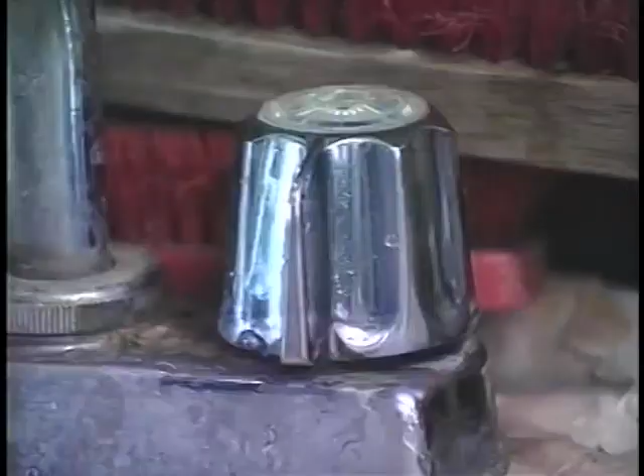Water hammer. It's a familiar sound nearly everyone has heard in their own home when someone slams a faucet closed. You've probably also heard it coming from radiators during the winter heating season.

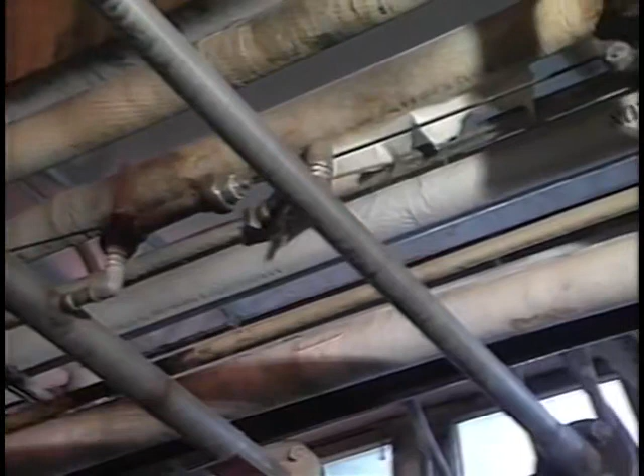In industrial situations, though, water hammer is more than just a noisy annoyance. Water hammer that results from localized abrupt pressure drops may never be heard, yet it can acquire great force,

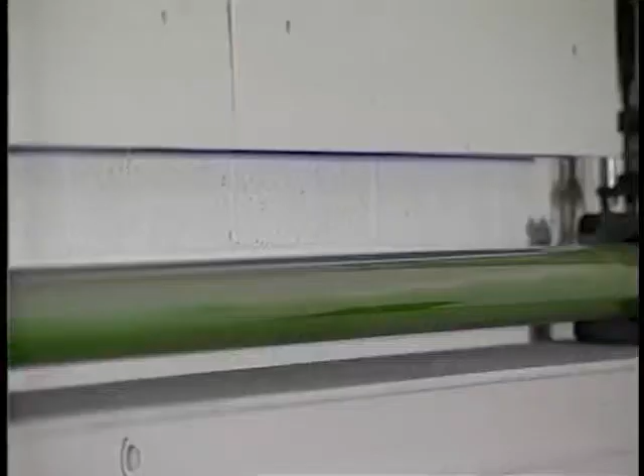damaging equipment, ruining product, and potentially putting personnel at risk. Water hammer begins when some force accelerates a column of water along an enclosed path. The incompressible nature of water gives it the power of a steel sledge as it slams into elbows, T's, and valves. The resulting vibrations are transmitted along the water column and piping, damaging fittings and equipment far removed from the problem source.

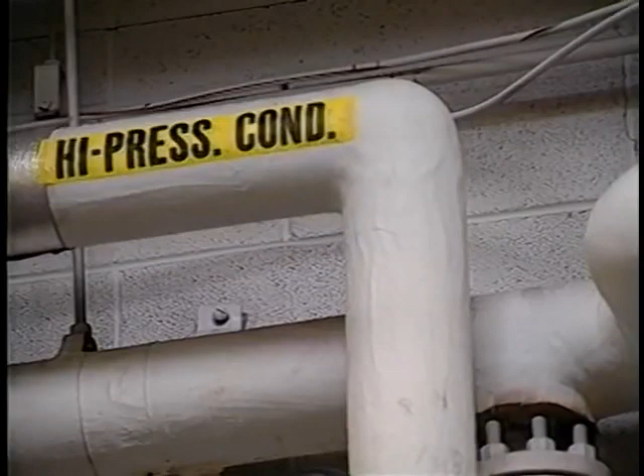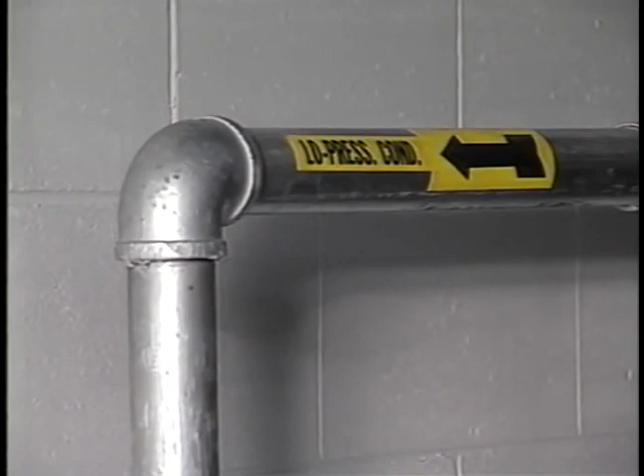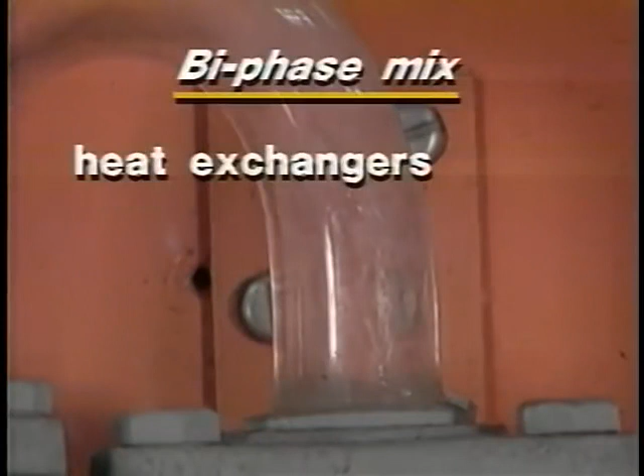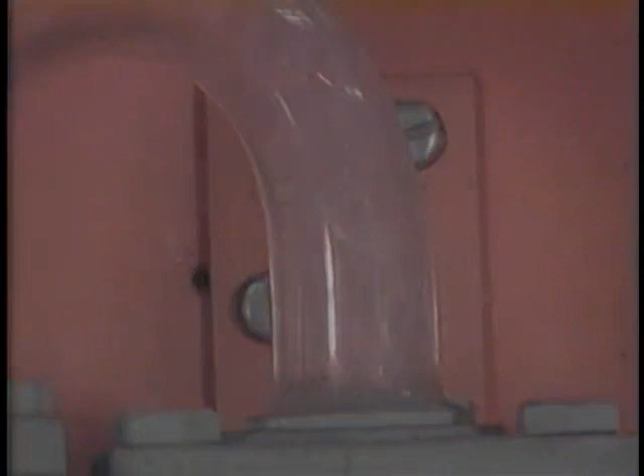Water hammer can occur in any water supply line, hot or cold, and its effects can be even more pronounced in biphase systems. Biphase systems contain both condensate and live or flash steam in the same space. Heat exchangers, tracer lines, steam mains, condensate return lines, and in some cases pump discharge lines may contain a biphase mix.

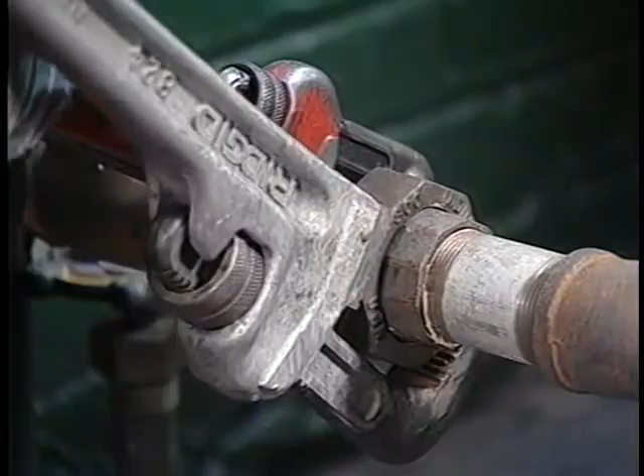Three distinct conditions have been identified which provide the force that initiates water hammer. These conditions—hydraulic shock, thermal shock, and differential shock—are common to many industrial fluid applications. However, following a few simple guidelines will help you minimize the occurrence of these shocks and diminish the chance of damaging water hammer.

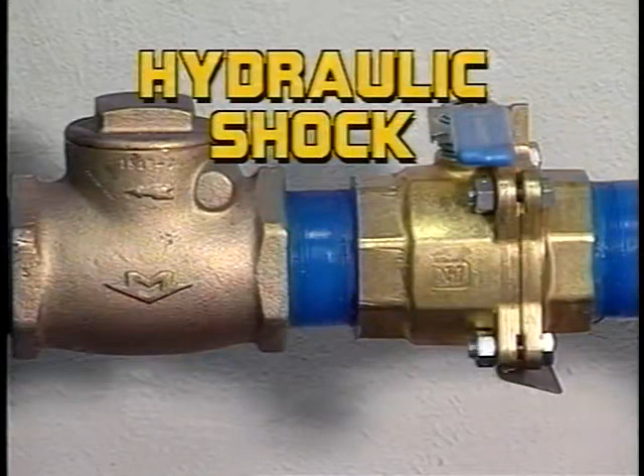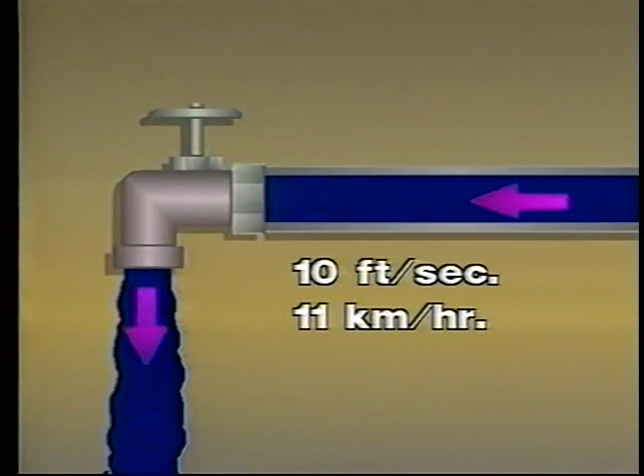Hydraulic shock occurs when a valve is closed too abruptly. When a water valve is open, a solid column of water moves from its source at the main to the valve outlet. This could be 100 pounds of water flowing at 10 feet per second, or about 7 miles per hour. Closing the valve suddenly is like trying to instantly stop a 100-pound hammer.

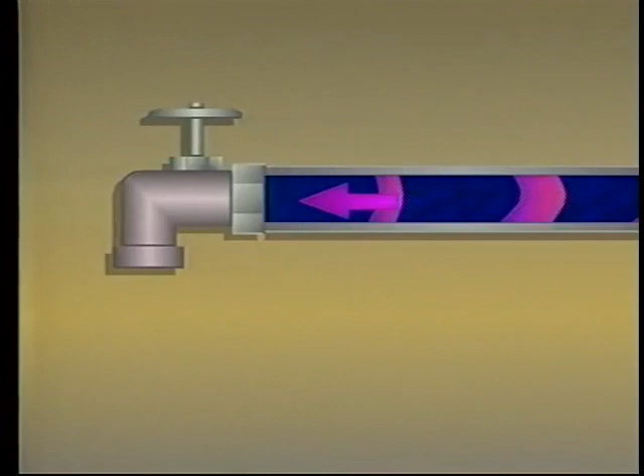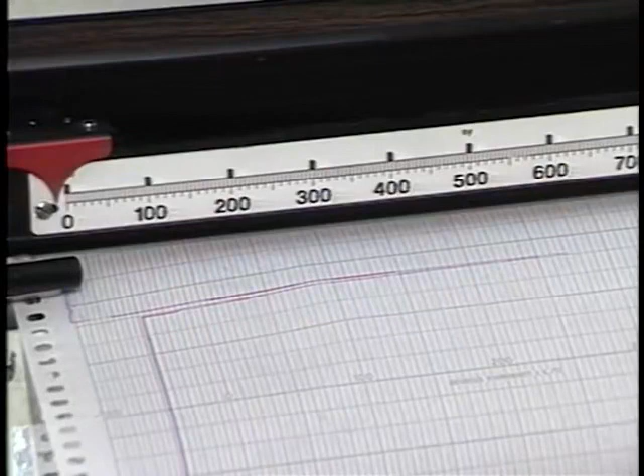A shock wave of about 600 psi slams into the valve and rebounds in all directions, expanding the piping and reflecting back and forth along the length of the system until its momentum is dissipated. By closing the valve slowly, the velocity of the water is reduced before the column is stopped. Since the momentum of the water is decreased gradually, damaging water hammer will not be produced.

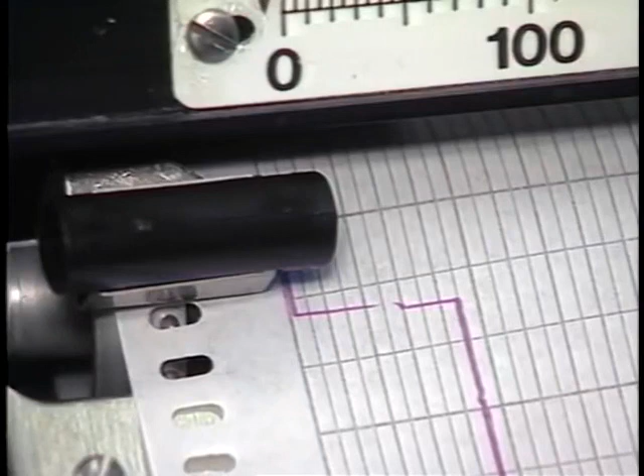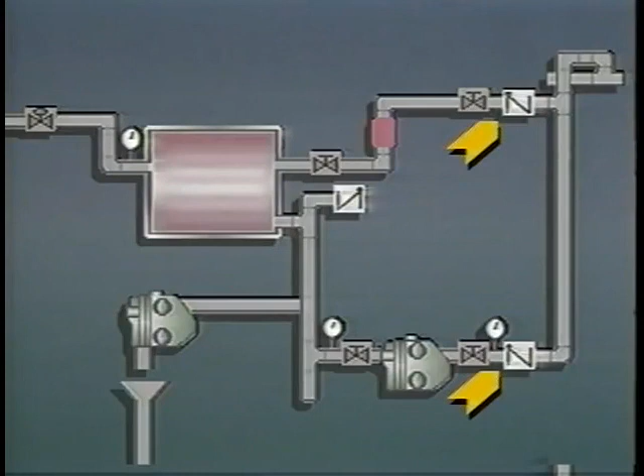Sometimes check valves can produce hydraulic shock. Swing check valves are often used to prevent liquid being drawn into spaces that are subject to intermittent vacuums. They are also applied to prevent backflow from elevated systems when adequate pressure to raise the liquid cannot be guaranteed. In either case, the acceleration of the reversing column of liquid may be quite high. If the swing length of the check valve is sufficient, the column will build enough inertia to cause hydraulic shock in the time it takes the valve to slam shut.

Substitute silent or non-slam check valves for swing checks to prevent water hammer in these situations. Silent check valves are center-guided to provide a much shorter stroke than swing checks. These valves also use a spring to help in closing. The result is that silent check valves are closed by the loss of upstream pressure rather than the reversal of flow, preventing hydraulic shock.

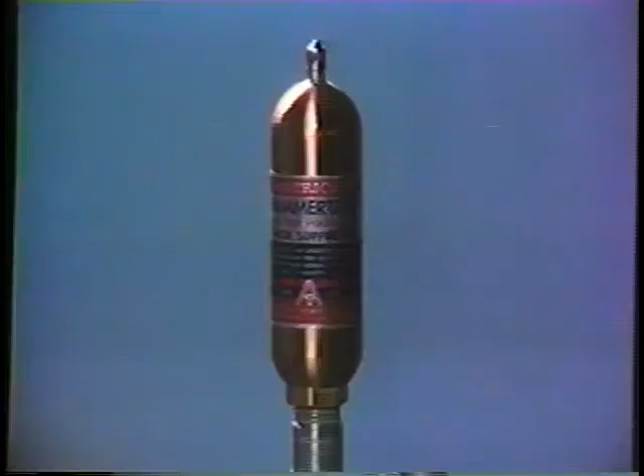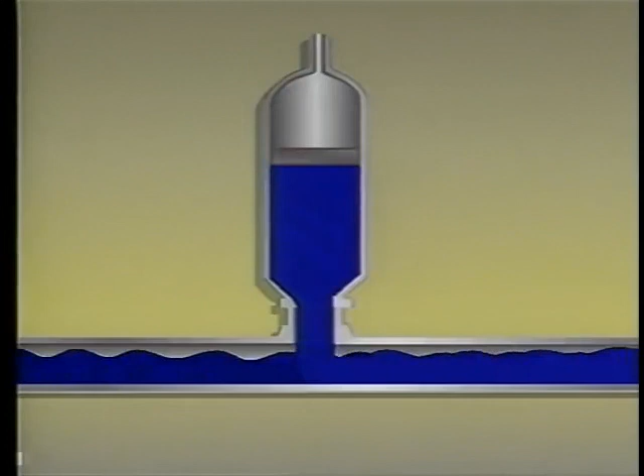Water hammer arresters, if correctly sized, placed, and maintained, will reduce water hammer. When the forward motion of the water column is stopped by the valve, part of the reversing column is forced into the water hammer arrestor. The water chamber of the arrestor expands at a rate controlled by the pressure chamber, gradually slowing the column and preventing hydraulic shock.

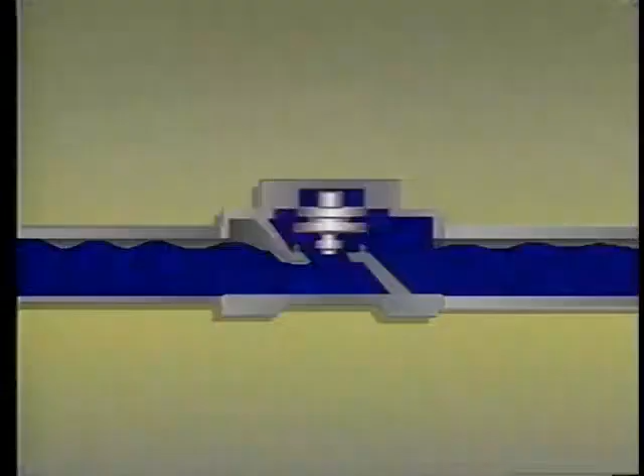To prevent water hammer due to hydraulic shock, avoid suddenly stopping water columns. Ensure slow closure of valves and install spring-loaded, center-guided, non-slam, or silent check valves that close before flow reversal when appropriate. Use water hammer arresters if necessary, but be sure they are sized and placed correctly and are well maintained.

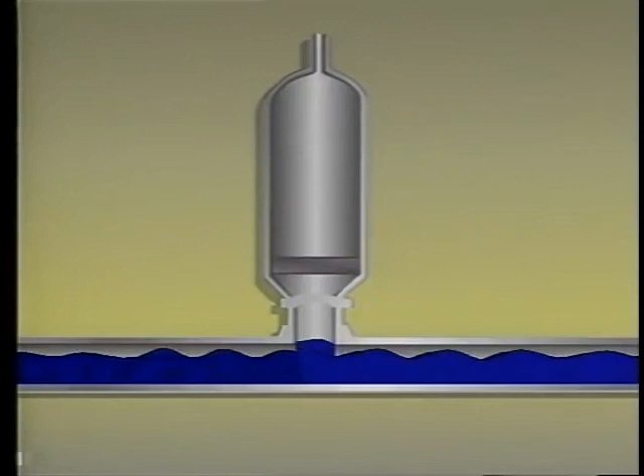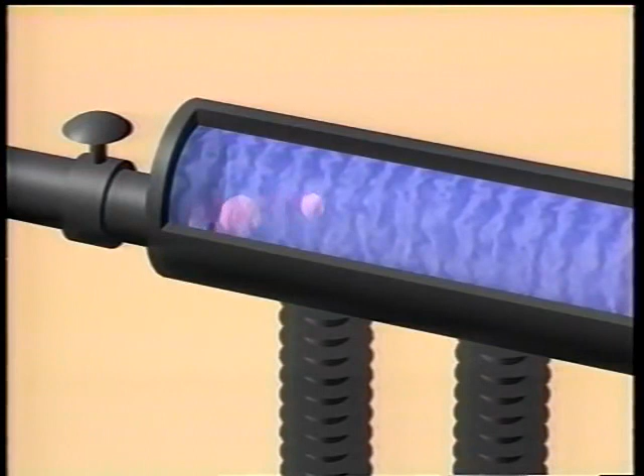Water hammer may also be initiated by thermal shock. In biphase systems, steam bubbles may become trapped in pools of condensate. Since the condensate temperature is usually below saturation, the steam will immediately collapse.

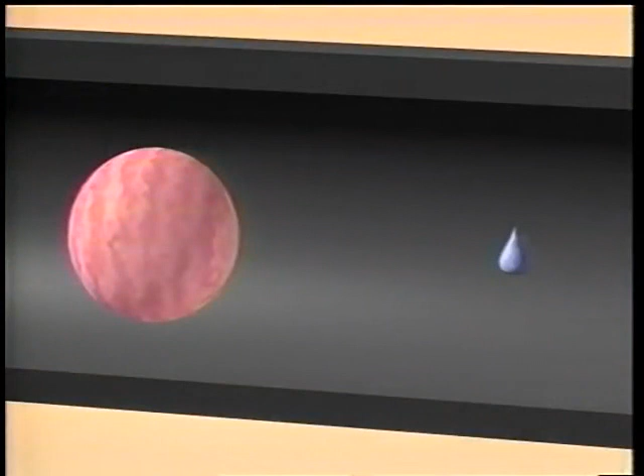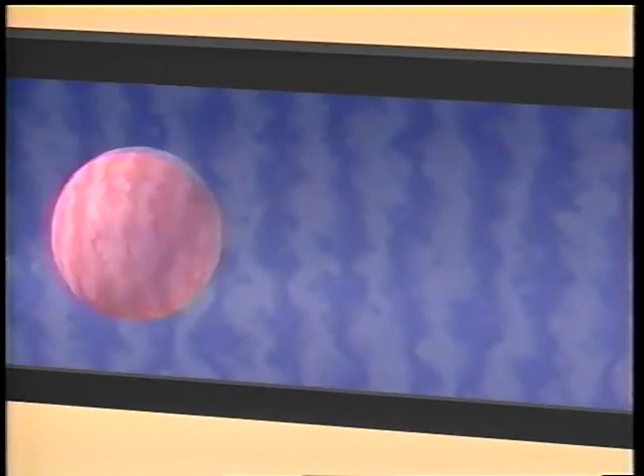Steam occupies hundreds of times the volume of an equal amount of water. When the steam collapses, water is accelerated into the resulting vacuum from all directions. When the void is filled, the water impacts at the center, sending shock waves in all directions. One likely place for thermal shock to occur is in steam utility corridors.

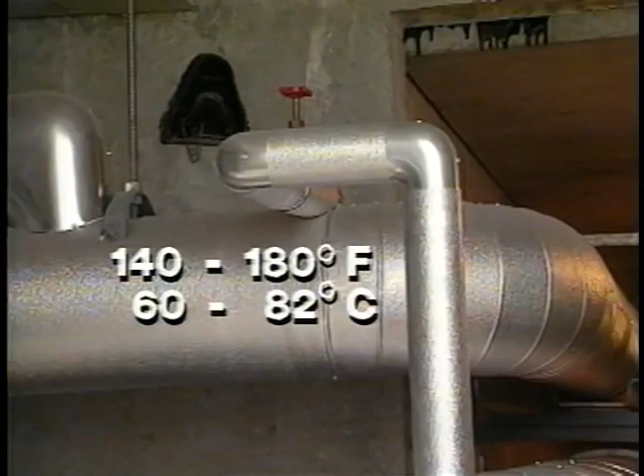In these areas, drip traps from high-pressure steam mains often discharge directly into pumped condensate return lines. The temperature of condensate in these lines usually ranges from 140 to 180 degrees Fahrenheit. The condensate being discharged from the steam trap is at nearly steam temperature when it passes through the trap orifice.

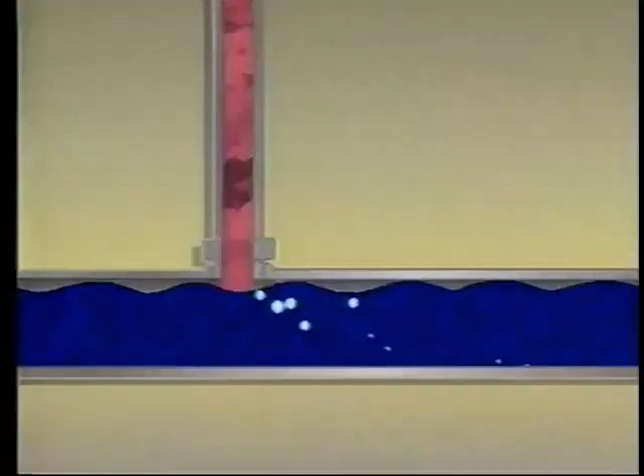When the trap discharge enters the low-pressure condensate line, a great deal of it flashes back into steam. The flash steam immediately collapses again when it encounters the relatively cool pump discharge water. This thermal shock often causes damaging water hammer.

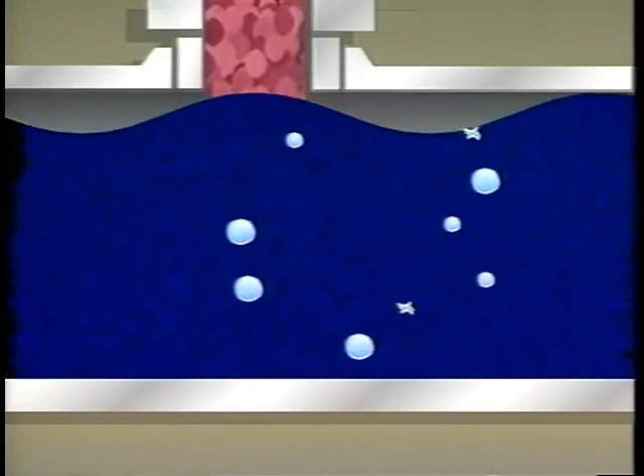The localized sudden reduction in pressure near the wall chips away piping and tube interiors. Oxide layers that otherwise would resist further corrosion are removed, resulting in accelerated deterioration of piping and equipment.

To minimize such a disturbance, the drip trap should discharge in the direction of condensate flow by means of a special fitting. This method of controlling thermal shock, called sparging, reduces the concentration of collapsing steam bubbles and keeps the action from occurring by the pipe wall.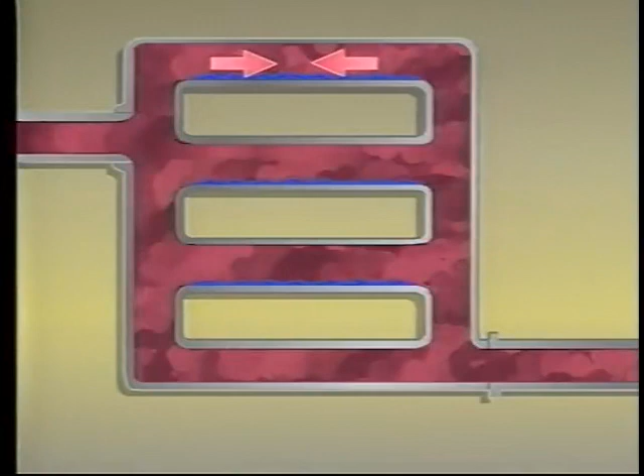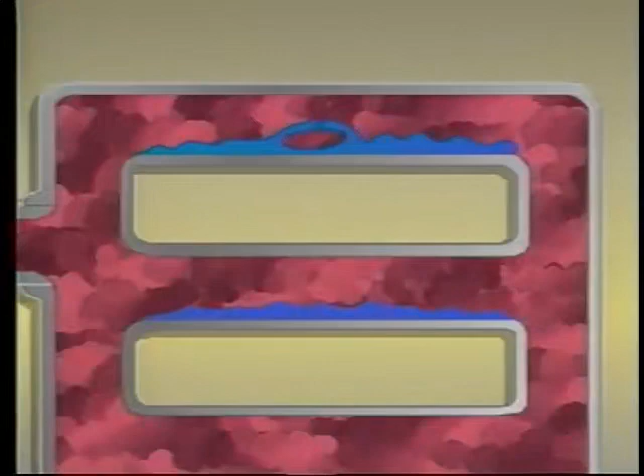With steam flowing into both ends of a tube, waves of condensate flow toward each other. These waves have the potential of trapping pockets of steam between them. If this happens, thermal shock will result when the pocket of steam collapses, and water hammer will probably occur.

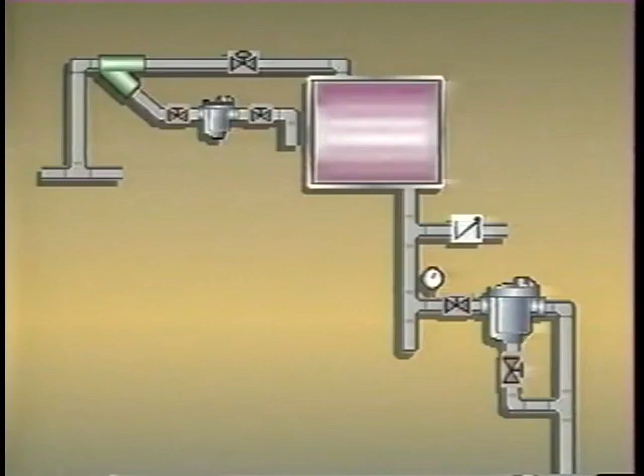Prevent the thermal shock generated by such a design by substituting a constant purge device, such as a differential condensate controller, for the steam trap. Condensate controllers maintain a positive differential pressure across the coil at all times. All the tubes will be fed from the supply end only, preventing the entrapment of steam and the resulting thermal shock.

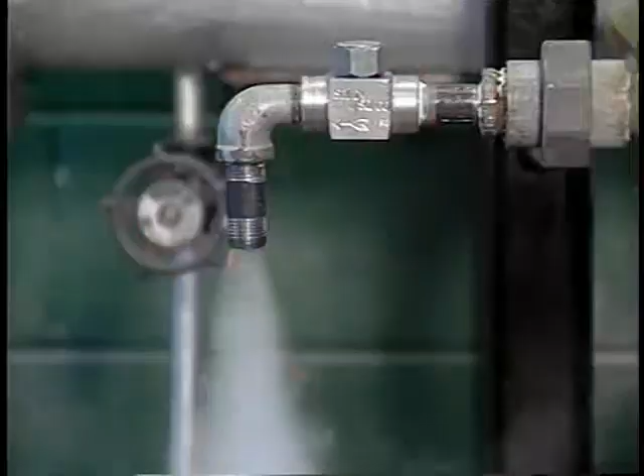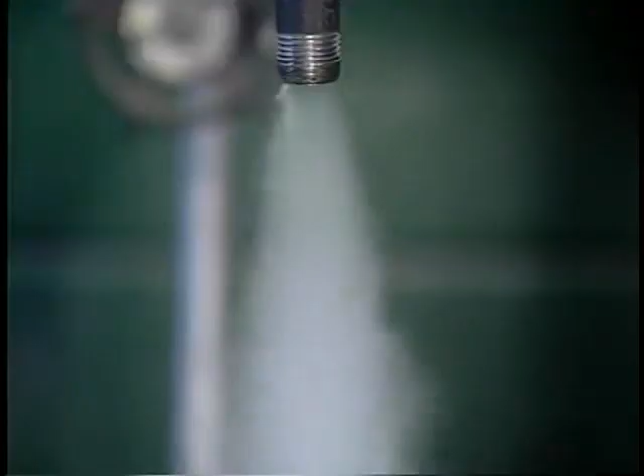Malfunctioning steam traps may also contribute to thermal shock, followed by water hammer. A steam trap that has failed open injects live steam directly into the condensate return line. If this steam is mixed with return line condensate of sufficiently low temperature, it will immediately collapse, and thermal shock will follow.

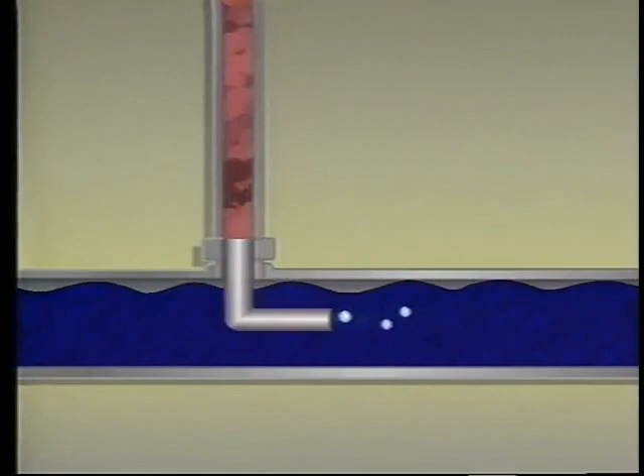To prevent the occurrence of water hammer due to thermal shock, you must reduce the concentration of collapsing steam bubbles in the condensate. If flashing condensate must be discharged into a cool condensate line, it should be discharged in the direction of condensate flow and away from the pipe wall. Precautions must be taken that heat exchanger tubes are always filled from the supply end only.

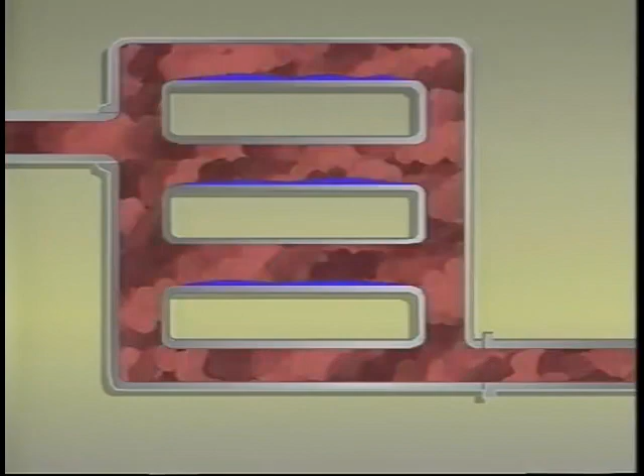Differential shock, like thermal shock, occurs in biphase systems. Differential shock can occur whenever steam and condensate flow in the same line, but at different velocities, such as in high-pressure condensate return lines.

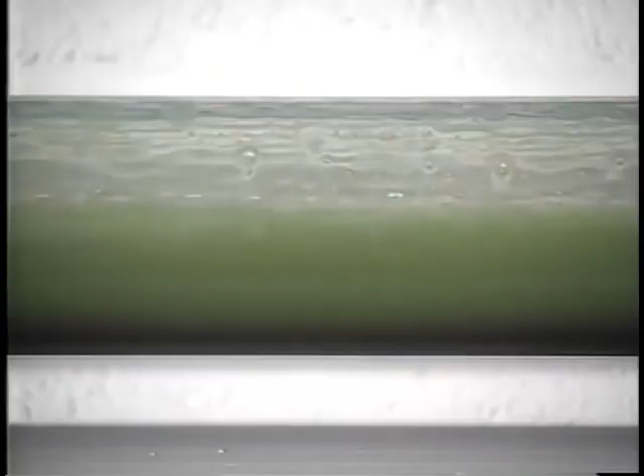In biphase systems, the velocity of the steam is often 10 times the velocity of the liquid. If this gas flow causes condensate waves to rise and fill the pipe, a seal is formed with the pressure of the steam behind it.

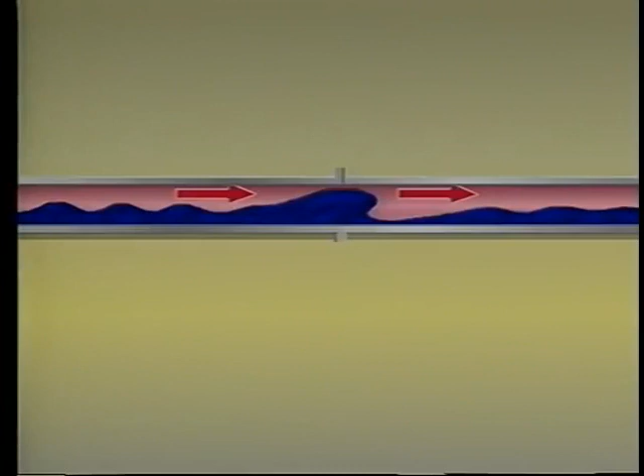Since the steam cannot flow through the condensate seal, pressure drops on the downstream side. The condensate seal now becomes a piston that is accelerated downstream by virtue of this pressure differential. As it is driven downstream, the piston picks up more liquid that is added to the existing mass of the slug, and velocity increases. This is differential shock.

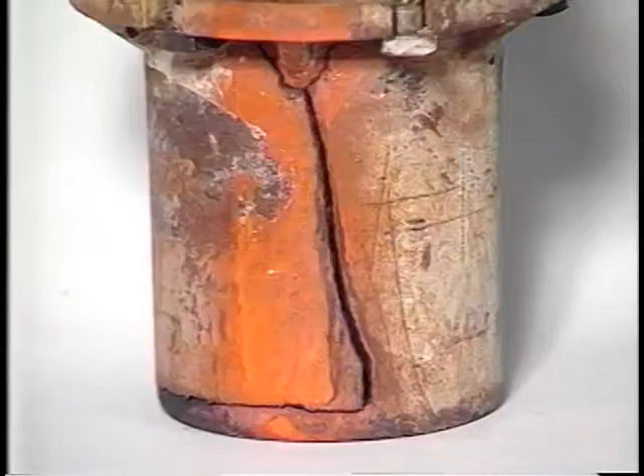If the slug gains high enough momentum and is then required to change direction at a T or elbow, or is stopped by a valve, great damage can be done.

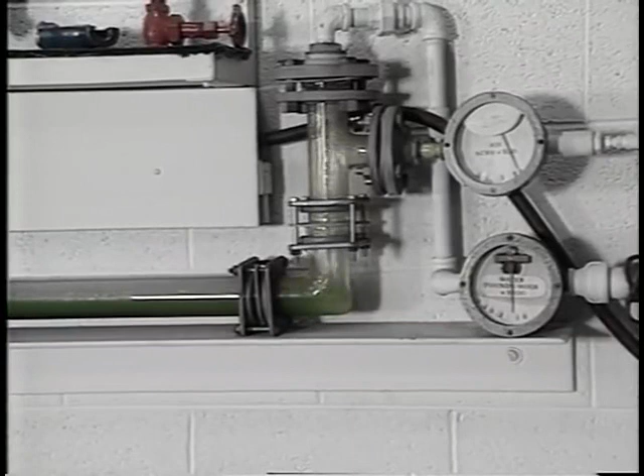In the demo lab at Armstrong International, we have assembled a fixture to illustrate the problem. We use this 20-foot, 2-inch diameter glass pipe to act as a condensate return line. The pipe is pitched 1/4 inch in 10 feet to provide gravity flow.

Flowing through the pipe, we have cold water. In addition to water, we can also have compressed air flowing in the system to simulate flash steam flowing across the top of the condensate by virtue of differential pressure.

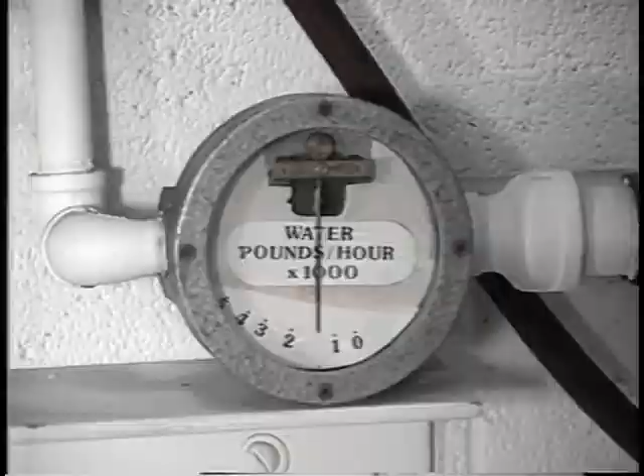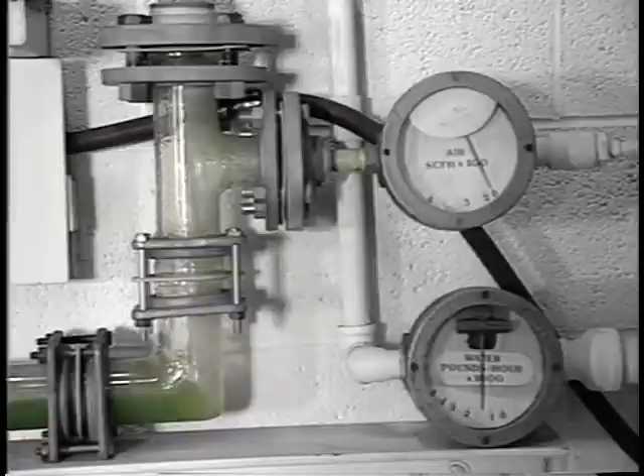One flow meter constantly measures the flow rate of the water. Another flow meter continuously monitors the flow rate of the compressed air. As you can see, we now have 1,500 pounds per hour of water flowing in our glass pipe, and no compressed air. Under this condition, our pipe is approximately half filled with water.

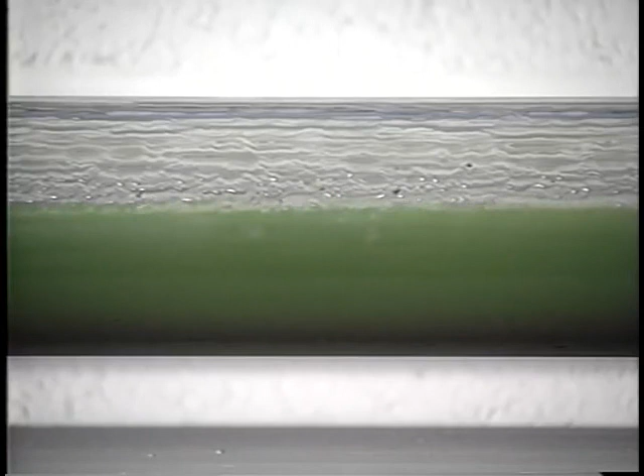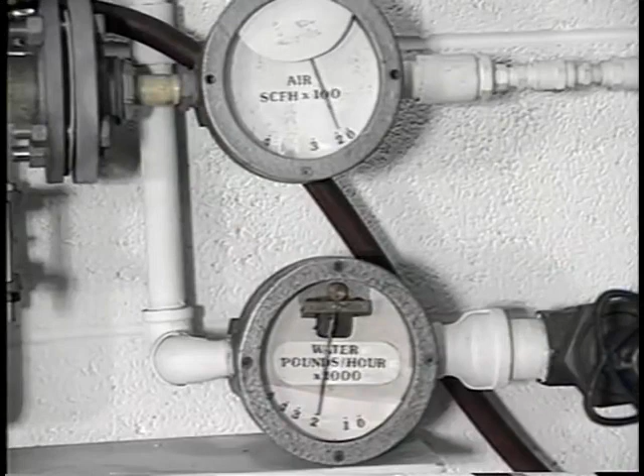As we increase the flow rate of water in our pipe to 2,000 pounds per hour, the depth of the water increases to 5/8. We now introduce compressed air into the system to simulate flash steam, with a flow rate of about 200 standard cubic feet per hour, and the depth of the water recedes.

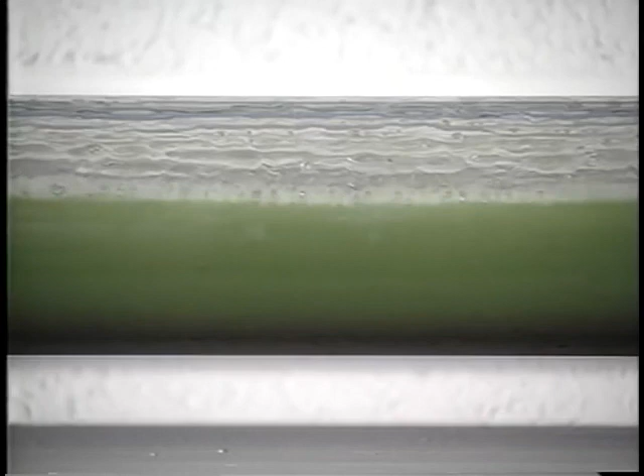We are increasing the speed of the water flowing through the pipe by virtue of the velocity of the gas flowing across its surface. Observe now as the compressed airflow increases, the waves formed on the surface of the condensate become higher.

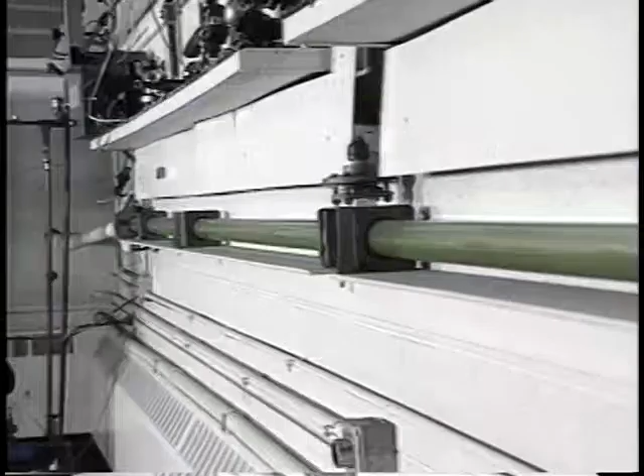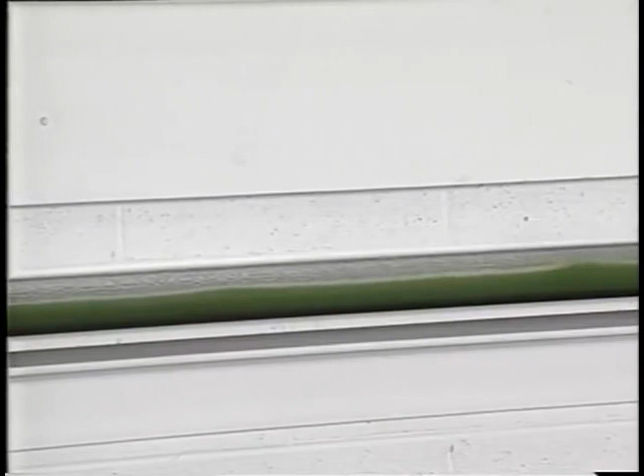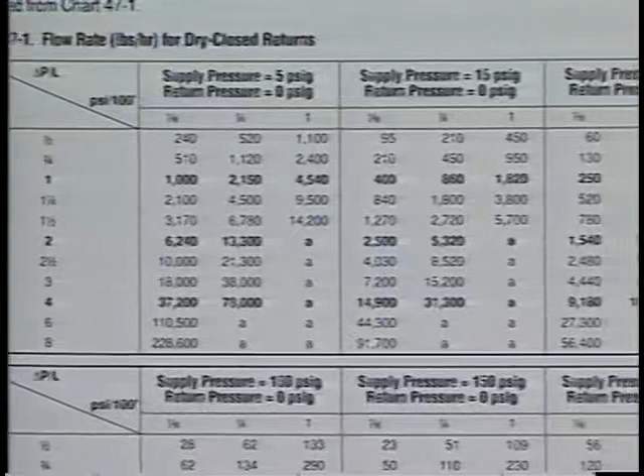Further increasing the airflow causes the waves to block off more of the cross-section of the piping until a seal is formed, completely closing off the pipe. A slug of condensate is accelerated downstream by the pressure differential, becoming a piston that gains in mass and velocity as it travels. The proper sizing and pitching of condensate lines are the only means of guarding against this type of problem.

The Armstrong Steam Conservation Handbook includes a chart that helps you in deciding the correct condensate return line size for your particular application.

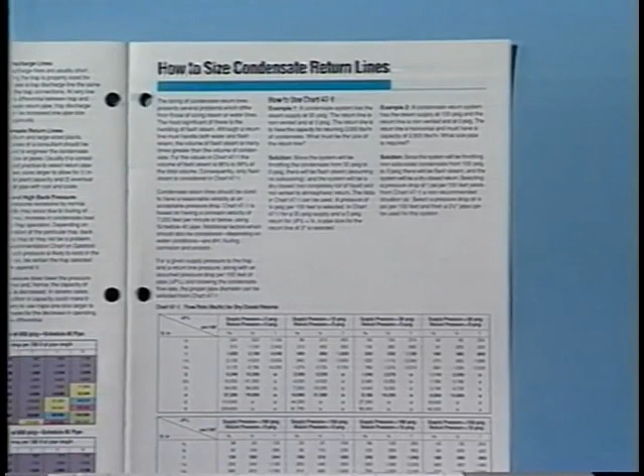Differential shock can also become a problem when elevated heat exchange equipment is drained with a substantial vertical drop ahead of the trap. Under normal conditions, condensate drains down the walls of the pipe. A sufficient volume of steam constantly flows down the center of the pipe to replace the steam that is condensed by radiation losses of the piping and the trap body itself.

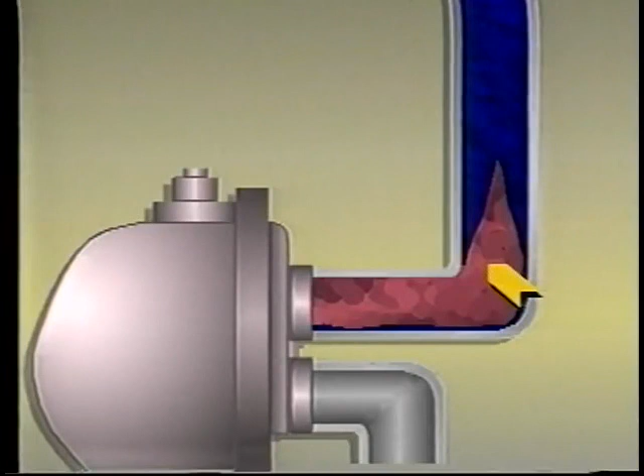The steam flow rate increases if a thermostatic element such as the bellows or wafer in an F&T trap opens. If a slug of condensate seals off the pipe, steam collapses downstream of the seal. Again, a pressure differential forms, and this, along with gravity, accelerates the slug. When this piston strikes the trap, it can damage a float, the thermostatic element, or other parts of its mechanisms.

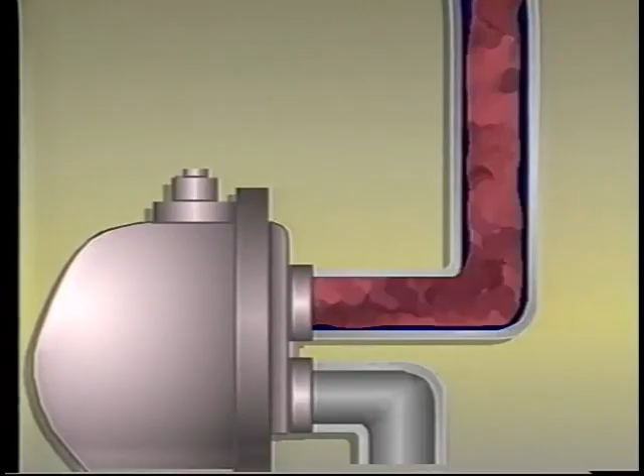To avoid differential shock arising from this situation, use an F&T trap and back vent it to the top of the vertical line to maintain near equal pressure throughout the riser, even if a slug of condensate forms.

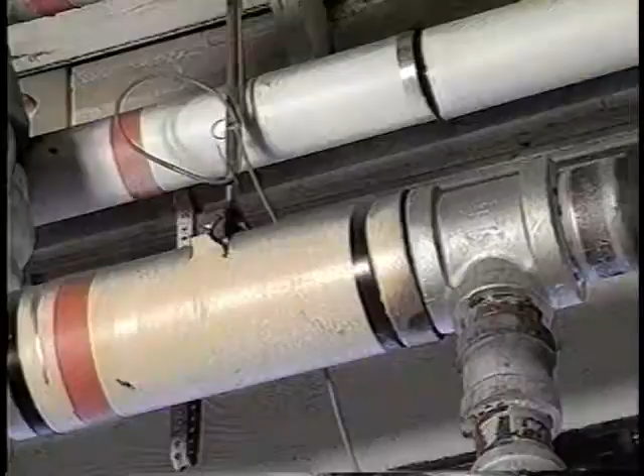In both of the two previous cases, the condensing of steam downstream of the seal produced the acceleration. It follows that the likelihood of differential shock arising and causing water hammer is greater in uninsulated pipes, especially on outdoor systems, than in insulated pipes. Long runs of any kind between the heat exchange equipment and the trap can produce this situation and should be avoided.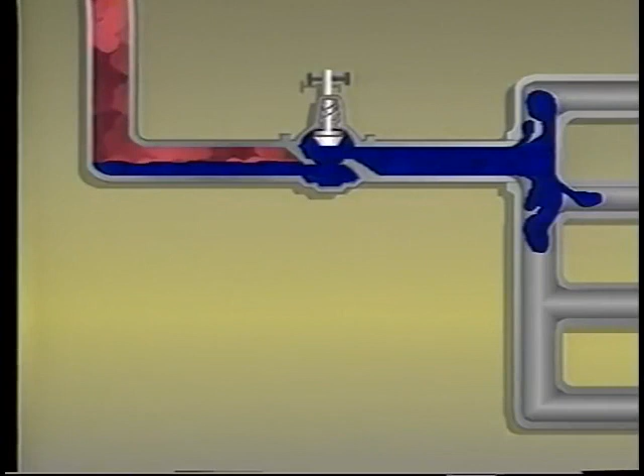Damaging water hammer may also occur due to differential shock whenever there is an improperly dripped pocket ahead of a control valve. Condensate builds up in front of the valve while it is closed. When the valve is opened, the slug of condensate is driven through the valve and into the piping and equipment by the live steam.

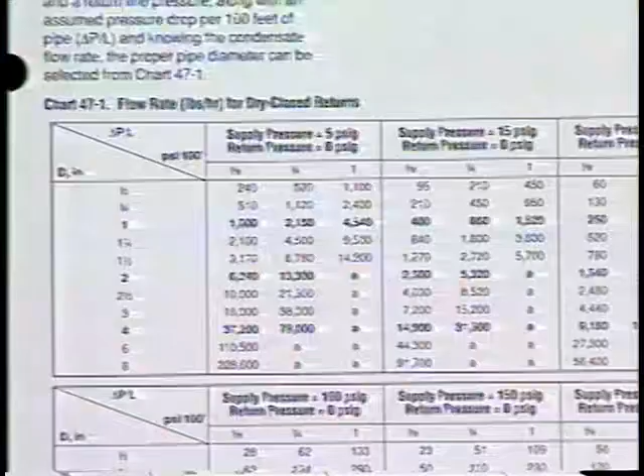The placement of a riser and a drip trap immediately upstream of the control valve will prevent this rampaging slug. To control differential shock, you must prevent condensate seals from forming in biphase systems. Condensate lines must be sized correctly, and long vertical drops to the traps must be backvented.

The length of the lines to traps should be minimized, and the lines may have to be insulated to reduce condensing. The installation of a proper drip leg ahead of control valves will prevent differential shock from occurring when the control valve is opened after a period of closure.

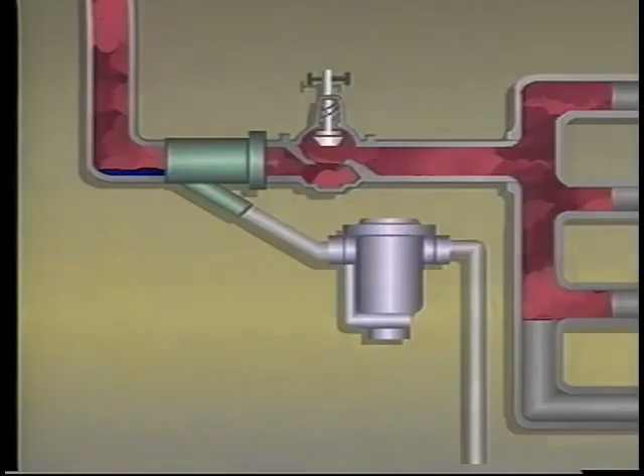Careful attention to these few guidelines will prevent most water hammer.

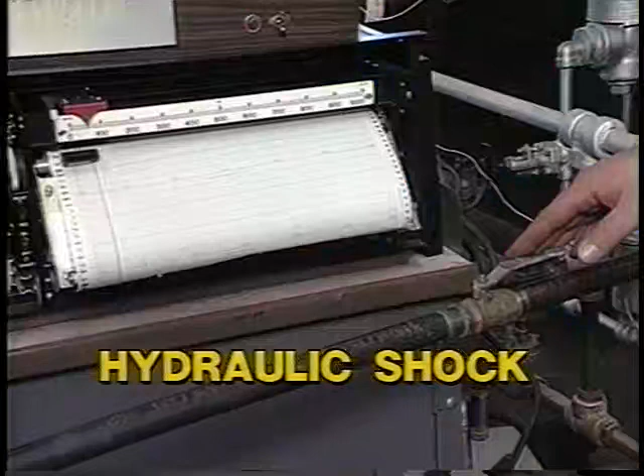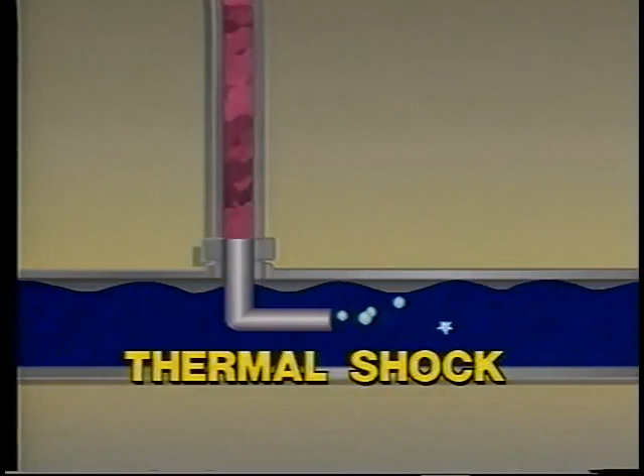Prevent the sudden stopping of water in pipelines by closing manual valves slowly and by installing spring-loaded, center-guided silent check valves where appropriate. Prevent thermal shock by using a sparging tube wherever flash steam is discharged into condensate at a lower temperature, and by ensuring that heat exchanger tubes are filled from one end.

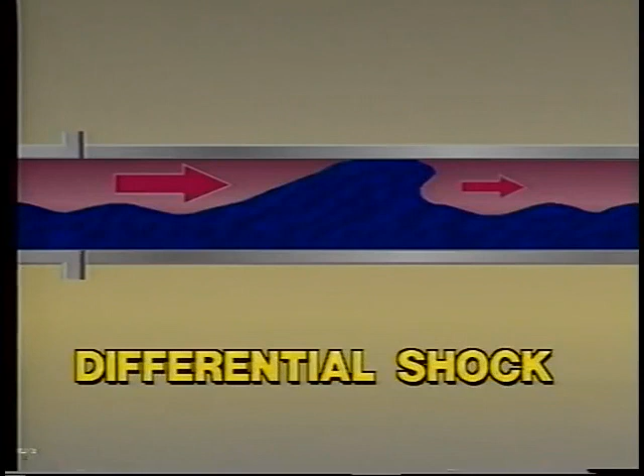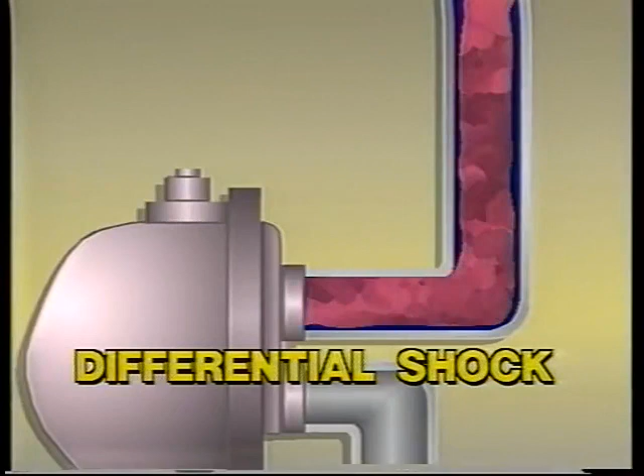Prevent differential shock in biphase systems by providing return lines that are properly pitched and of adequate size. Avoid draining equipment with long lines to the trap, and insulate condensate lines whenever necessary.

Following these guidelines for the proper design and operation of your system will minimize the likelihood of the shocks that cause water hammer. This, in turn, will greatly reduce the likelihood of damage to your system, to your product, and to your personnel.